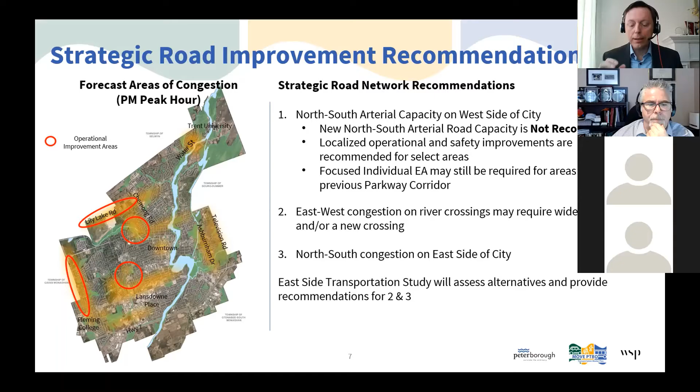On the west side, we're looking at improving safety and operations through localized improvements to intersections. You'll see there are some road improvements as well. We're trying to look citywide, but in the next couple of slides you'll see how these items identified at a strategic level are now coming to you in recommendations.

As we get into those recommendations, I'm going to stop sharing my screen and invite Jean Chartier from Paradigm to come forward and present the draft recommendations from the East Side Transportation Study that's been ongoing at the city level. With that, I'll hand it over to you, Jean.

Great, I can see your screen, Jean. Yeah, there we go. And I can hear you now. There we go. Thanks. Yes.

Thank you, everyone, for joining us today for the Public Information Center regarding both the city-wide Transportation Master Plan and, specifically what I'll be talking about for the next little while, the East Side Transportation Study. This study is looking more specifically at the area of the city east of the river and north of Lansdowne. This is our second Public Information Center today.

Just to briefly overview the study area we're specifically looking at: as I mentioned, it's east of the river, north of Lansdowne, to just beyond the city limits to the east. We've also included some aspects of the county's transportation network within the study area, given there is some interrelationship between the city road network and the county road network.

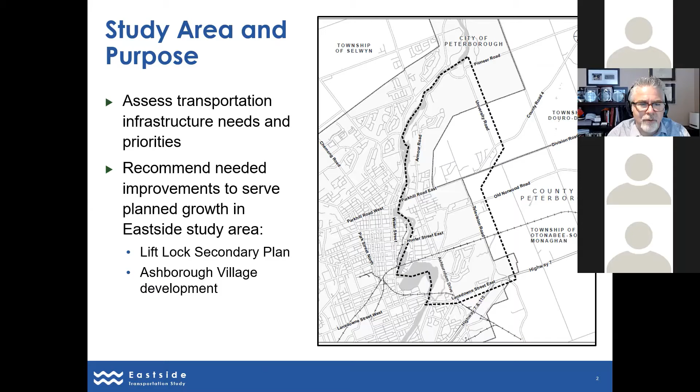What we're trying to do through the East Side study is come up with more detailed recommendations specific to this area that will then be implemented in conjunction with the overall Transportation Master Plan. So we're looking to assess the transportation infrastructure needs and priorities within the East Side study area and recommend improvements needed to serve planned growth, specifically the Lift Lock secondary plan area and the Ashborough village development. Those development areas are south of Parkhill, west of Television Road, and constitute significant growth planned within that area of the city.

We're undertaking the East Side Transportation Study in accordance with the Municipal Class Environmental Assessment, and specifically the master planning process identified within the Municipal Class EA. I know that's a lot of jargon, but basically it means we're conducting the project in accordance with an approved provincial process to ensure we meet the requirements of the Provincial Environmental Assessment Act for the infrastructure improvements that come out of the study.

The Municipal Class EA process typically has 5 phases, and specifically for the work we're doing through the master plan, we're addressing phases 1 and 2. We previously spent time information gathering and identifying problems and opportunities, and that was presented to folks through our first Public Information Center, which I'll talk about in a second.

We're now through phase 2, the alternative solutions part, looking at what the preferred alternative solutions are to address the identified problems and opportunities within the East Side study area, as well as coming up with an implementation strategy to go forward once the study is over. We still have to prepare our study report, but we're a good way through the study at this point in time.

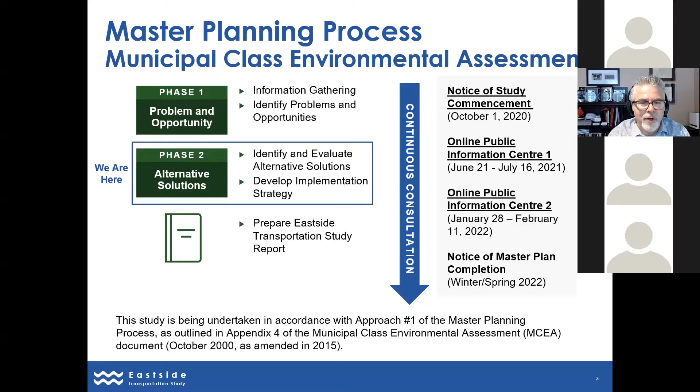We've had a previous public information center last summer, running from mid-June to mid-July. At that point we presented background on the study, information about the municipal Class EA process, the study area, the problems and opportunities, potential alternative solutions, and the next steps in the process.

Based on that information, we received feedback from interested parties and stakeholders. A lot focused on ensuring the future transportation plan for the east side took into consideration all modes of transportation. The need for improvements to bridge crossings, to accommodate vehicles as well as other modes, came up high on people's priorities, along with ensuring that growth in the east side area was properly accommodated from a transportation perspective.

Through our work to date, we've identified a series of transportation issues reflected in the problems and opportunities statement, which I'll discuss shortly. These were presented through our first round of public information center last summer, looking at the various transportation issues of concern in the east side area.

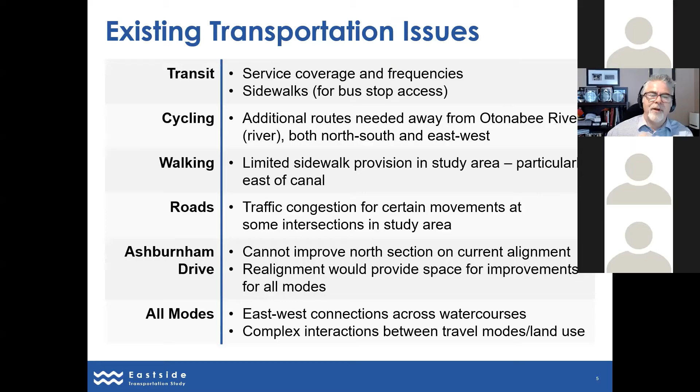The need for additional east-west crossings of the watercourses is also a concern. Based on the research we've done and the identification of problems and opportunities, what we're trying to accomplish through the East Side study is accommodate the significant growth anticipated in the East Side area with enhanced transportation system improvements across a variety of modes, aligning with the city's approved transportation master plan strategy, specifically the objective to reduce single occupant vehicle use and reduce greenhouse gas emissions.

As an outcome of the study, we're trying to identify the specific infrastructure and other transportation system improvements needed within the East Side study area.

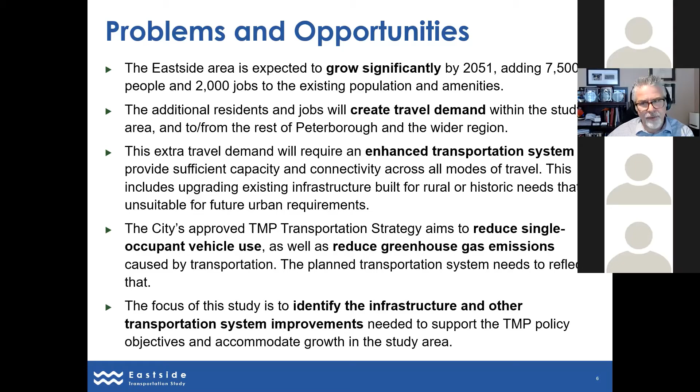In terms of the alternative solutions considered for the East Side study area, we broke them into four groups, with the first alternative being the do nothing, which maintains the existing transportation network and service levels, compared against a series of additional alternatives.

Alternative 2 is implementing the recommendations already coming forward from the citywide transportation master plan, the cycling master plan, and the city's transit study, excluding any new or widened roads within the East Side transportation study area identified in the version of the citywide transportation master plan currently available for consultation. This looks at what would happen without expanding or changing any roads in the East Side study area.

The third alternative, alternative 3, is a specific infrastructure-related alternative to modernize the aging and deficient infrastructure within the study area. We'll talk a little bit about that in a second.

Finally, alternative 4 is expanding the road network, broken into both north-south and east-west roads. This is where it's been important for us to link with the overall citywide transportation plan, because the forecasting that the city and Brett's team have done on an overall citywide basis has identified the need for additional north-south and river crossing road capacity within the east side area.

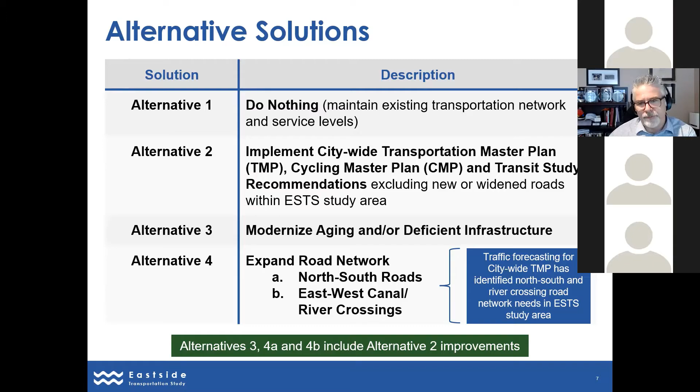Alternative 1, the do nothing alternative, is just to maintain what the city has and make no further modifications. But this really doesn't achieve the solution to the identified problems and opportunities, so we didn't carry it forward for detailed evaluation. Any of the other alternatives would be compared against the do nothing, to ensure that the do nothing is not the preferred means of moving forward.

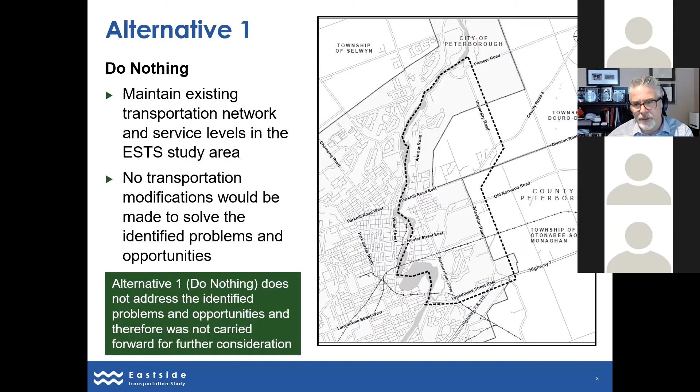The second alternative, implementing the citywide TMP, cycling master plan, and transit study recommendations, looks at the series of already planned transportation projects and service changes that impact the east side transportation study area. There are a number of already planned works in terms of cycling network improvements, walking and pedestrian network improvements, as well as the transit service improvements that Brett referred to earlier, that will happen regardless of future roadworks within the east side area.

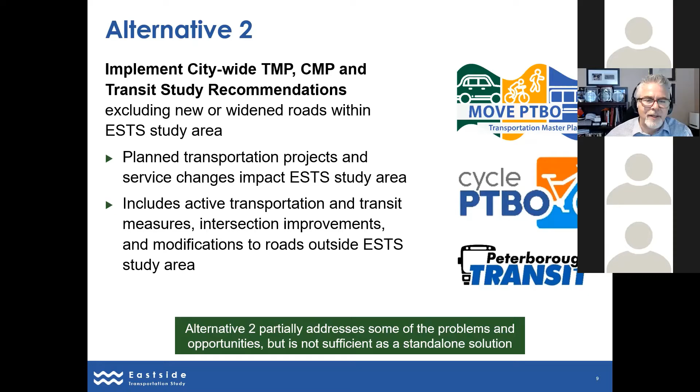That was our alternative 2, and we felt that it partially addressed some of the problems and opportunities, but it was not sufficient as a standalone solution. It does factor into the 2 remaining alternatives because this is going to happen independent of any infrastructure recommendations within the east side area. So it's important to recognize that these changes will occur, but in and of themselves, they aren't sufficient to address the identified problems and opportunities.

As part of alternative 2, we have identified some key intersection improvements that would form part of it, and that get carried forward into the remaining alternatives, alternative 3 and 4. So we've identified those intersection improvements to carry forward as well.

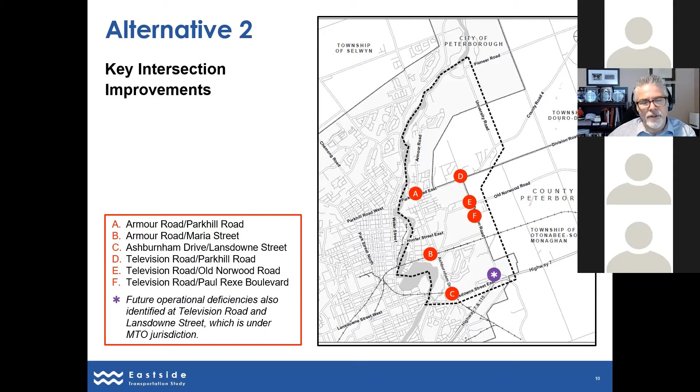Our third alternative, which we've called modernizing aging and/or deficient infrastructure, is aimed at upgrading or replacing any of the existing roads or bridges within the east side study area that don't meet present day needs and/or design criteria. There are a number of those we looked at: realigning Ashburnham Drive, upgrading Maniece Avenue, Old Norwood Road, and McFarlane Street, to a more urban standard given that growth is going to occur within the area.

Looking at a new crossing of the canal to replace or supplement the McFarlane Street crossing, we also looked at a potential realignment of Hunter Street and a new 2-lane canal crossing without widening the existing river crossing, just putting a new crossing in place of Hunter Street in lieu of the current lift lock structure, and then that would be extended over to Television Road. Finally, looking at reconstruction along Parkhill Road as a fifth option within this category.

We also wanted to note that there are other ongoing initiatives, both by Parks Canada to replace or rehabilitate the Maria Street canal crossing, as well as the city looking at improvements to Television Road, specifically across the South Meade Creek, as well as the North End and Trent University area environmental assessment that's ongoing, looking at further roadworks in the area just south of Trent U in that circle that's shown.

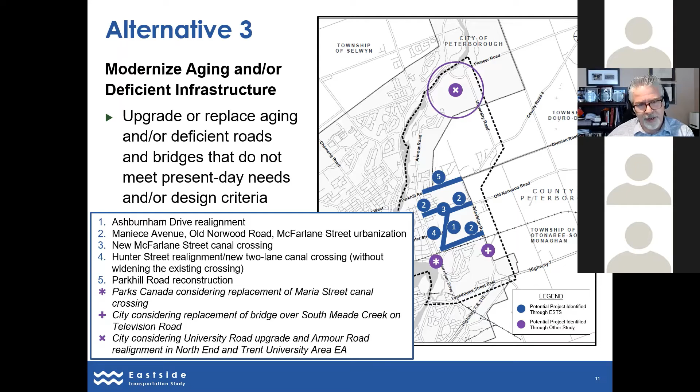Our alternative 4, we broke into 2 parts, a north-south roads versus east-west roads part. The description of the works is similar between the two alternatives. Basically, what we would be doing in these cases would be adding new roads or modifying existing ones to serve growth and accommodate all users.

In the north-south direction, we looked at a series of different options. One was extending Ashburnham Drive from its current terminus at Old Norwood, McFarlane area up to Parkhill, an improvement or new road project identified through previous studies. We also looked at widening Ashburnham Drive from Lansdowne to Maria, Television Road widening, and potential widening of Peterborough County Road 4 and realigning it to make a more continuous north-south connection between TV Road, County Road 4, and University Road.

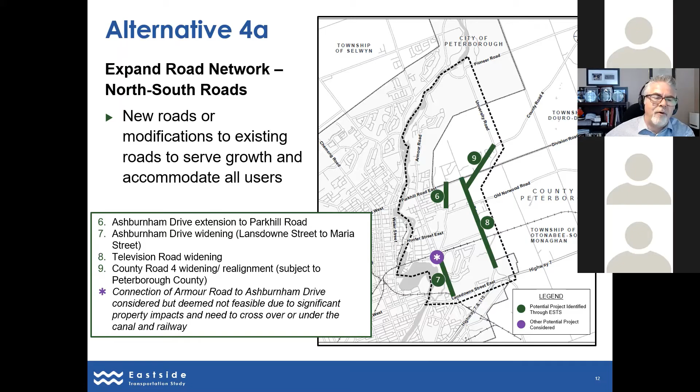We did think about whether there was merit in looking at a connection of Armour to Ashburnham, because a lot of the traffic demand that happens on Ashburnham south of Maria is driven by traffic that comes from the north along Armour. But that improvement is really not feasible given some pretty significant property impacts, as well as the tight space for crossing over or under the canal, as well as the railway that's in the area.

And then finally, our fourth alternative for our second grouping of road network expansion is in the east-west direction, to address the need to get over the river with additional traffic capacity. Because the river and the Trent Severn waterway are so close, you need to consider them together.

So we looked at a widening of Parkhill Road and the river crossing, extending Maria Street to Television Road. There currently is a corridor reserved by the city for that potential road improvement. We also looked at connecting Maria Street to Sherbrooke Street, including a Maria Street extension over to Television Road, recognizing that project could occur in different parts, and recognizing there are some challenges to implementation and concerns associated with that. So it's one we did look at and give some serious consideration.

And then finally, also looking at widening of Lansdowne. As mentioned, the city is doing the EA for the North End and Trent University area, and there is some discussion about widening roads within that area in the east-west direction.

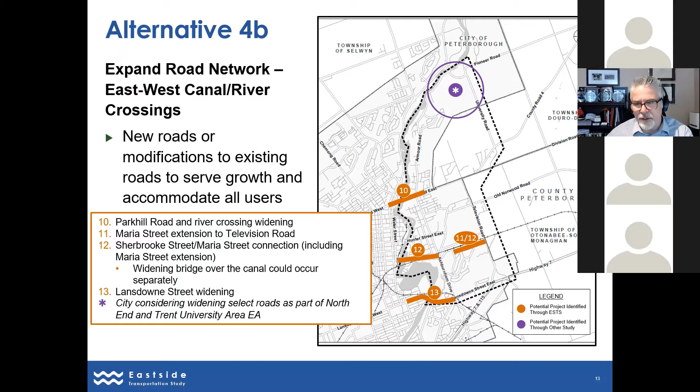So we took all of those alternatives that I just shared with you and ran them through an evaluation based on four factor groups: transportation, environment, social, and economic. There is a lot of detail in the evaluation process available on the Connect PTBO site that provides further detail and information that would be very difficult to share through this medium. But there is further information available, and we encourage you to go have a look at it on the Connect PTBO site.

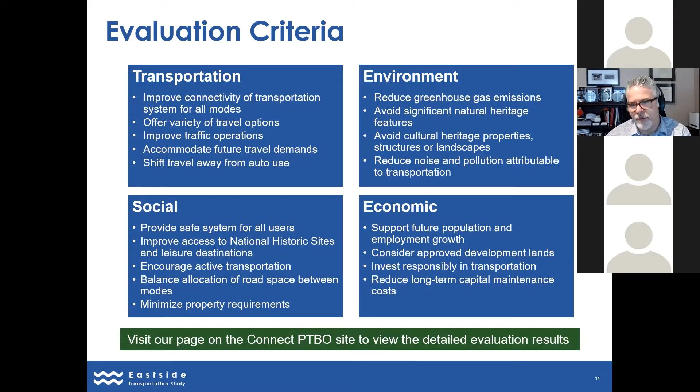So based on the evaluation process, we've come up with the following recommendations. We're recommending implementing the citywide transportation master plan, cycling master plan, and transit study recommendations, as they will factor in regardless of if there are any road or infrastructure improvements within the east side area.

We've identified select items of infrastructure to improve. Of all the different options we looked at, we felt that the Hunter Street realignment and new connection over the Trent Severn waterway really didn't provide much additional value and didn't address the problems and opportunities very well. So it's not carried forward as part of our recommended solution.

And then finally, we are recommending some expansion of the road network in the east side area. Specifically, we're looking at all of the improvements identified on the previous slides, save and except we don't see the merit of extending Ashburnham up to Parkhill, given the anticipated future traffic flows and travel demands forecasted with the city's travel forecasting model, as well as we don't see the merit or value of widening Lansdowne to 7 lanes from its current configuration.

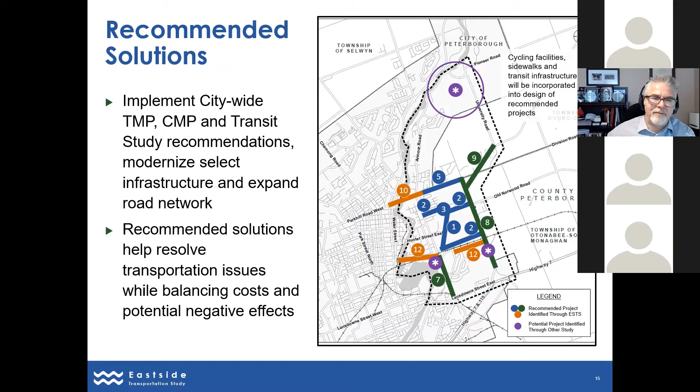For the purposes of getting a better sense of how these various projects might fit together, we've done a preliminary staging analysis that lays out the various initiatives identified specific to the East Side Transportation Study Area into logical groupings in terms of what might come first and what needs to come second. We've broken them into 3 priority groups.

So the initial group of priorities would be the intersection improvements that can be accomplished without having to dramatically change the road network at this time. There would also be the Ashburnham Drive realignment, which is a really important project because it addresses concerns about its location within the floodline associated with the Trent-Severn waterway, helping resolve an existing operational concern the city has.

We also think that in the early stages, the urbanization of Maniece, Old Norwood, and McFarlane are good steps to make forward, given the fact the area is urbanizing, and it will provide additional support for growth in the area. And looking at the new McFarlane Street canal crossing before considering anything on Parkhill, recognizing that there needs to be additional relief before one would consider anything further on Parkhill.

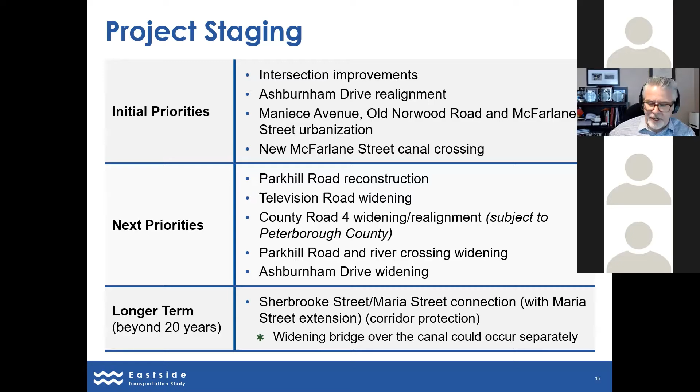In terms of next steps, we're putting together our recommendations and report, which will be presented to City Council later this winter, early spring. We're putting together the notice of study completion once the recommendations are presented to City Council and accepted. Assuming the recommendations are approved, we would then move forward with phase 3 of the municipal Class EA process for the Ashburnham Drive realignment. Ultimately there would be a number of further studies required for municipal class environmental assessments for all of the other road projects that have been identified, and those will be identified through future city capital budgets and forecasts.

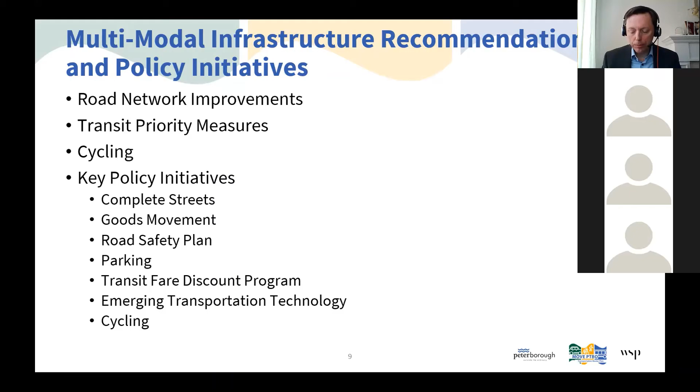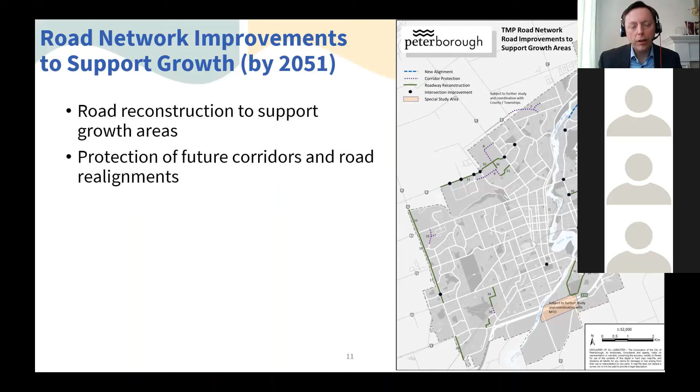On the screen, you can see in purple or blue some future corridors and road realignments that we think will be needed at a later date as development occurs. On the north end of your city, there's planned development, so there'll be additional road network constructed as part of that, and realignment on the east side, along with some improvements there. So these are the first group of road network improvements I want to address.

We've added a number of different items onto the screen now to show areas for intersection, operation, and safety improvements. We've heard safety time and time again throughout our presentations and consultation. So we see opportunity to improve safety and also improve the flow of whatever mode of traffic is going through the intersection at certain locations.

Sometimes there might be an unsignalized, stop-controlled intersection, say along Brealey, that we could convert to a signal that would help the flow, reduce rear end collisions, and provide signalized crossings for pedestrians, cyclists, and people not in a car. You'll see several of those along the west side of the city.

The yellow lines are showing to provide a center turn lane. You'll see that on the north end along Chemung, and on the south end at several locations along Lansdowne, just to highlight a few. This provides a center turn lane so that anyone turning left would be out of the way of people going through.

This is also seen as a safety initiative, because it reduces the likelihood of a rear end collision if someone was slowing down to turn left and a car behind didn't notice and struck them. With a center turn lane to exit off the through lane, that helps the flow of traffic and enables turning movements, both into places and out of them if entering the road. You'll see those in yellow at a number of locations.

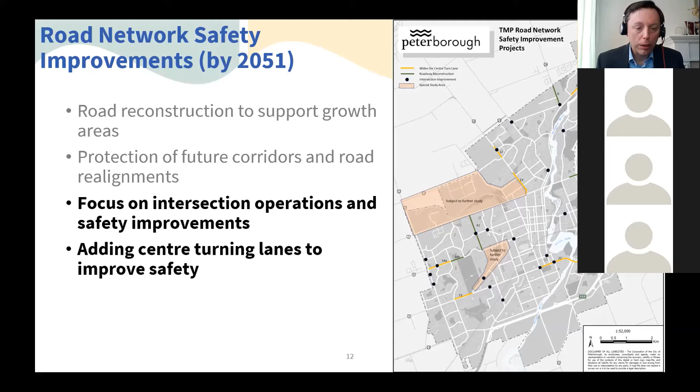The final group is showing some strategic road widening. Gene has talked about a couple that you see on the east side of the river in red, like Ashburnham Drive and Television Road. He noted the need to protect the corridor for the long-term potential of a bridge crossing between Sherbrooke and Maria.

You'll also see some works around the northern part of the city, around Trent University, as Gene mentioned, as part of the North End Environmental Assessment, which is ongoing. So we are reflecting those as well, showing different areas. A key area we've identified throughout this is our bridge crossings.

We do see a need to widen Parkhill to provide four lanes to facilitate movement. Although we don't have a lot of black dots along the red part of Parkhill, we would be improving intersections at the same time. We're not going to widen the road and not fix the intersection and come back later.

We know that frustrates everybody and it's not a good use of funds. So we haven't put black dots there, but I wanted to say that we've noticed a number of challenging locations along Parkhill that could use improvement on the intersections to improve the flow of traffic for all modes of transportation. I'll really highlight that in the next set of slides.

There's a couple of areas shaded in a tan color. Those are subject to further study, be it areas on the north end of the city that are part of additional development, or in the central, west-central area around the Parkway and Clonsilla, which are under a Ministry of Environment order related to the Parkway. There's also some work needed with the Ministry of Transportation and the county in the south end and east end, respectively.

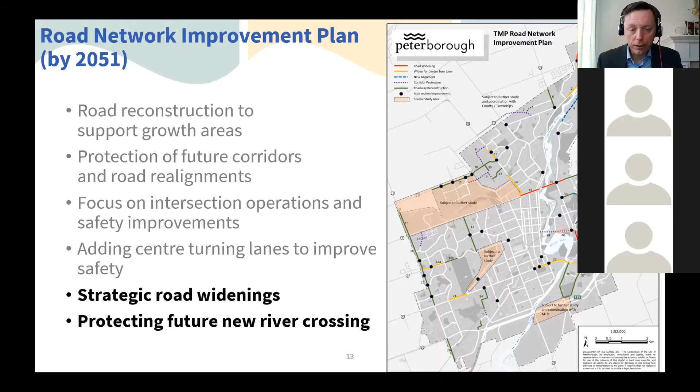So a comprehensive view of the road network improvements, but now I'm going to move into some transit priority measures, because transit is running on the same network as cars and trucks. So we want to see, are there ways to enhance transit to make it more attractive?

I want to give a little bit of background to get us all on the same page in terms of what we mean by transit priority treatments. These allow transit vehicles to bypass congestion in the general traffic lanes, like the lanes that you and I are driving in, increasing reliability and bus speed relative to the automobile.

If you're making a connection, you have to be on time, or else you might miss your connection, and no one wants to do that, especially here in the winter, given the current winter conditions.

So we are looking for ways to see if we can enhance transit through some priority measures, seeing that there's benefits on three different levels: for customers riding the transit, for the operators, and for society, because a big push of this is to help us reduce our total greenhouse gas emissions.

So if we can put in some measures for transit that help people riding it, that make it more efficient to operate, then we're going to have bigger benefits overall, as well as be able to attract more riders and reduce our total greenhouse gas emissions.

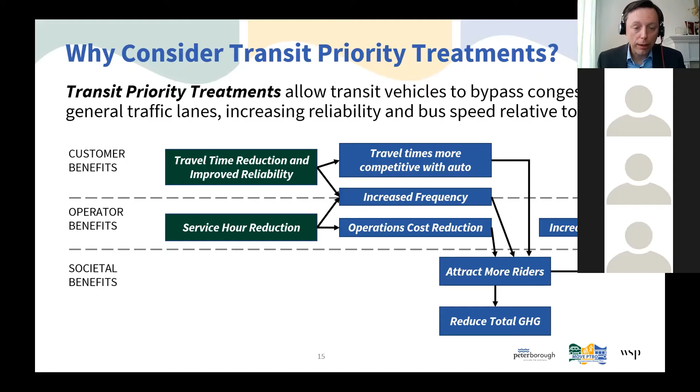Transit priority needs two things to happen to make it worth our money, worth our investment in financial resources. We need routes that have higher ridership, and we also are looking for routes that are operating in unstable traffic conditions where there are slow travel speeds or congestion that you can't always predict, like when you're going to arrive. Both of these conditions are required if we want to put in transit priority measures.

But as we increase the number of riders and increase what we're calling performance delay, that's really how much traffic is on the road - is there any delay for you as you're traveling by vehicle or bus. If we're seeing areas that have that delay, then those are the places we're going to focus on, taking our limited resources to try to improve transit.

That could be just retiming the signals for transit. If most of the traffic is going north-south, we need to have a longer green time for that.

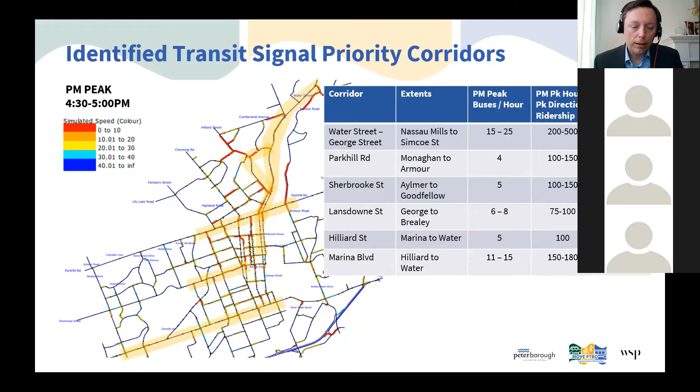Also on the south end along Lansdowne, we see that as a corridor for transit signal priority. We have it on the table with the names of the corridors and exactly where we're talking about, and we're trying to illustrate that on the map as well. We're seeing high ridership here, and there can also be high delay, so these are corridors we're focusing on as places where we could invest in transit.

If we were going to go to a level of putting in a bus-only lane for a short stretch or some other higher level treatment, we've identified 4 spots on your screen here, also summarized in the table.

I had talked about the improvements along Parkhill that we're recommending in the road network, and you can see that here as well. With those improvements, there's an opportunity to also improve intersections and add items for transit vehicles getting through those intersections to help them maintain their on-time status. That's a big part of getting more people to ride transit, knowing they can depend on it, that it's going to be there when they need it and will get them to their destination on time.

We've identified one up near Trent University, and you can actually see 3 of them. All 3 are along that Parkhill corridor that could provide opportunities for additional measures to improve transit.

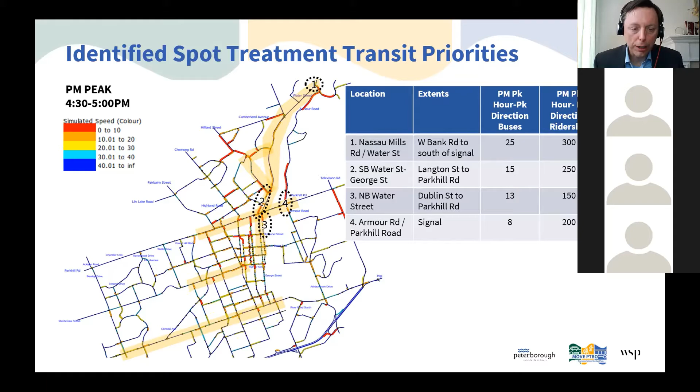I'm next going to go on to our cycling network. The city has been working hard on a cycling master plan, and you can find out more about that on the Move PTBO website. There's a page dedicated to it, just like there is for the transportation master plan and the East Side study, and there's also one for the cycling network.

The city staff and consulting team have come out with a cycling master plan that provides a blueprint to build a more cycling friendly city. The map on your right is showing the overall network. The solid lines are what you already have today, and the dotted lines are part of the recommendations in the cycling master plan.

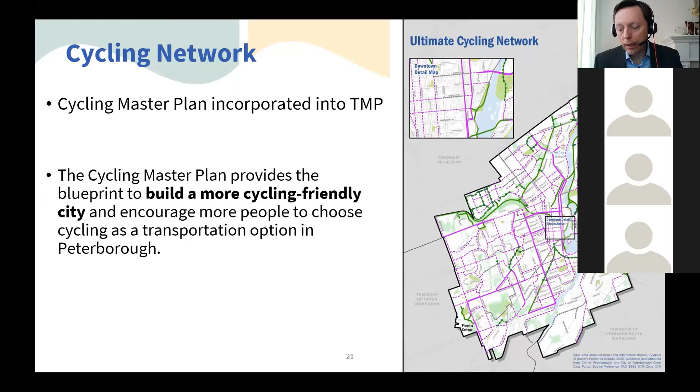It should be said that none of this is going to happen overnight, for the transportation master plan or the cycling master plan. Jean went through some of the prioritization, short, medium, and long term, so these things would be incorporated over time. The horizon year we're looking at in the transportation master plan is 2051, so we do have a long-term view. But here you can see a very comprehensive network being proposed that would allow you to get anywhere in the city, basically, using a bike.

Policy initiatives are important to help make this infrastructure more valuable, to leverage the investment, and to help us achieve the shift in mode we want, so that 35% of trips are not in the automobile but using some other mode of travel.

I'm going to go through a series of different policy directives, starting with the concept of complete streets, which is really an umbrella policy for transportation planning. It's an old concept we kind of got away from for a period of time and now we're getting back to. It simply means the transportation network should be designed for everybody and all modes of travel. After World War II, a lot of transportation thinking was to design from the center of the road out: you start in the center, provide for all the vehicles, and whatever is left over goes to anybody else.

But in the 21st century, and certainly the last 10 to 20 years, we've seen the thinking change to now say we're going to start from the outside and work in, so we can accommodate the most vulnerable users, the pedestrians, first, make sure we have something for them. Think about the cyclists, think about transit. We're always going to have space for roads, but we have to make sure we provide for the most vulnerable users first. So let's start on the property line, start on the outside and work our way in instead of the opposite. We're trying to plan for all modes of travel and everyone who's going to be using this.

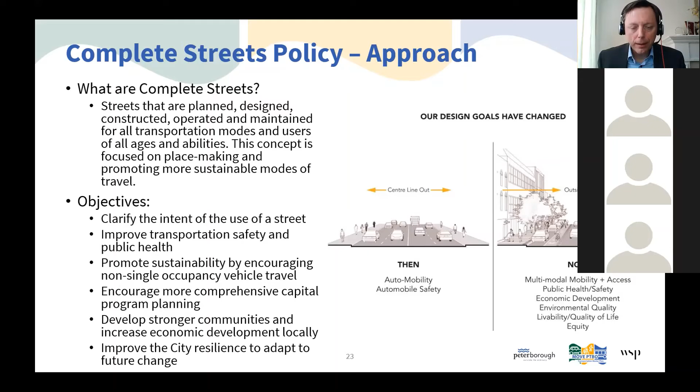As part of that, some draft initiatives come out of it. If the city is building new streets, there's going to be sidewalks on both sides, and cycling facilities if it's a collector or arterial road - full stop. This is part of the design of that road network. We don't say cycling on local streets because typically the volume there is low enough that you don't need cycling infrastructure. I cycle to work pre-pandemic, and on a local street it's perfectly comfortable without any facility. So we tend to focus our cycling infrastructure dollars on collector and arterial roads.

Same for transit. We don't have transit running on every single street, but on the streets where transit is running or is forecast to run, we want to make sure there's transit amenities. We all probably appreciate getting goods delivered to us, or having our stores full when we go shopping. So we have to consider truck design too, and this has to be made for Peterborough - it's not a one size fits all.

As part of these directives, the city can consider updating the design standards to make sure it's meeting these sub-bullet points in terms of providing for all modes of transportation, and to make sure the road network is tailored to better reflect the users' needs and who is using it.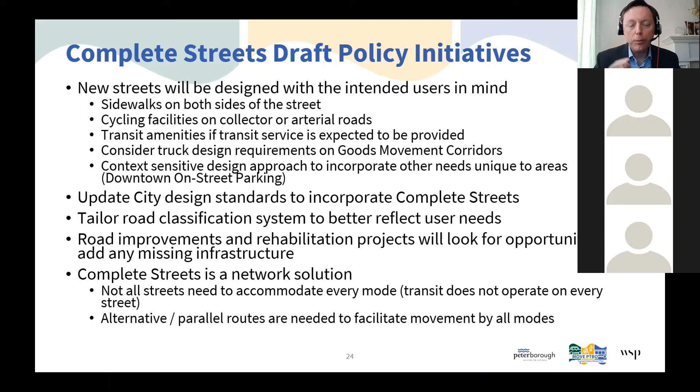I talked about new streets, but if the city is doing road rehabilitation, like rebuilding an existing street, there could be opportunities to add infrastructure that wasn't there originally. Each case will be case-by-case, but we want to use that opportunity to help complete the street. Not every street has to provide for every mode - it really is a network. So if this street doesn't have a cycling facility, we'd like a parallel street to have one, just to make sure there's connectivity by all modes of travel.

I alluded to goods movement on the previous slide. We've also been considering that as part of the transportation master plan, to address ongoing concerns with truck travel on a policy level and help us determine how they should be accommodated. Trucks are an important part of our economy - they represent a lot of jobs, not just for the person driving, but the person filling, the person unloading, and everyone else. So they're very important.

My family has certainly appreciated trucks being able to deliver stuff to our home, or being able to get goods if we go to a store. So we're trying to make sure we can accommodate trucks within the overall city network, for local deliveries and also just to get goods to market. There already are trucks operating - that's not a surprise to anyone - but we wanted to identify typical corridors that trucks need to use, to make sure we're providing facilities there and that the road pavement is up to the standard we want to accommodate trucks.

In Markham, where I live, there's one spot where you go over some rutting - it's like the constant use of trucks or other vehicles has made that part of the road sink a little bit. Not too bad, but it's noticeable. So we want to make sure we're providing for truck movements, both locally and regionally and province-wide, and that's part of our transportation master plan, recognizing that the city is not an island - we have to better connect to the county roads and the provincial network as well.

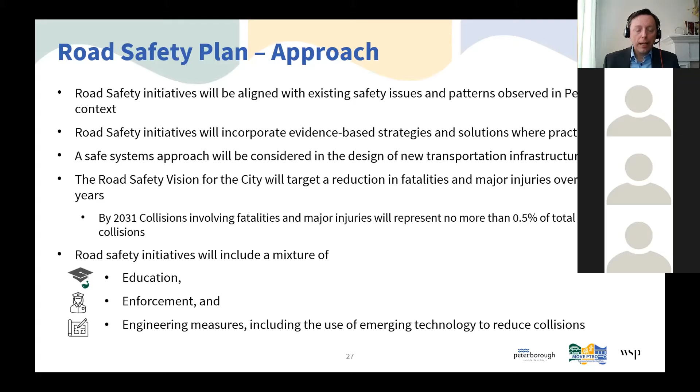Road safety has come up time and time again throughout our transportation master plan consultation. We've tried to address that through the transportation master plan with a number of different initiatives across 5 different categories, which I'll show next, thinking about how we can address road safety challenges with education, enforcement, and engineering measures. These items help make the road network safer and reduce the number of collisions, and certainly we want to have zero fatalities. We're trying to put a plan in place - it's a work in progress and can be refined in the future, but we're excited to put it on the screen right now.

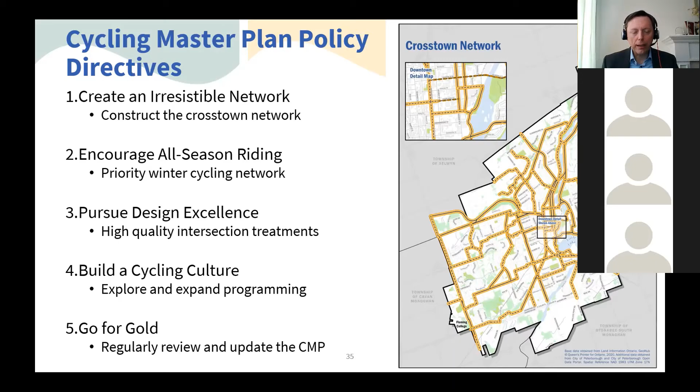If this network is realized, this is like your main structure that will allow people to get to the main destinations in the city, which can be built upon with smaller, minor networks. So 23 different recommendations are also being incorporated into the overall Transportation Master Plan coming out of the Cycling Master Plan.